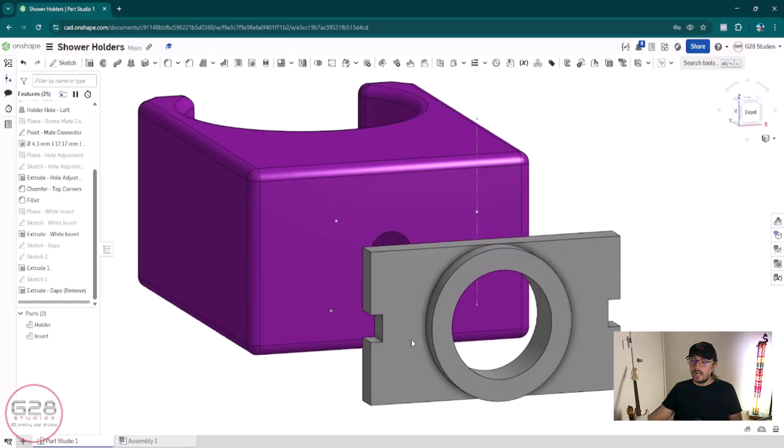So now what I need to do is remove this part from here. That's the interesting part.

So what I can do is something called... where is it? There is an option. Okay, so first I need to create a sketch here and then use this option, project convert. What am I going to project? I'm going to project this whole face. And as you see, it just did that for me. But...

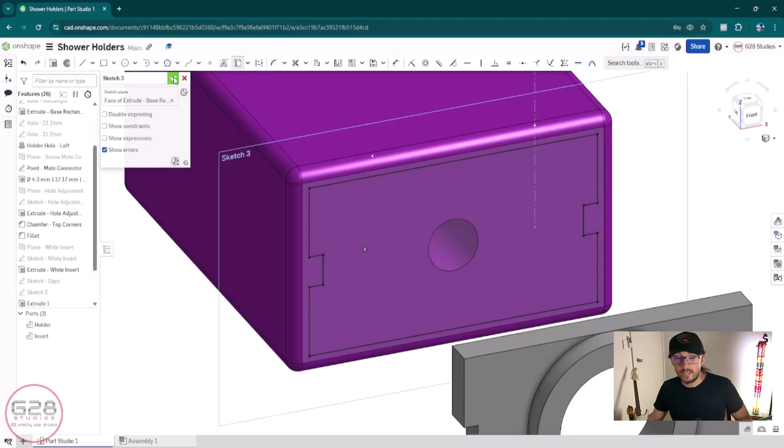Let's click OK and let's edit this sketch. So I need to give at least 0.5 millimeters of clearance, because if I do this that way, this white insert won't go through. I need to give it some space because 3D printing is not perfect, so there's gonna be some tolerances that you have to play with, which is 0.2, 0.3 millimeters difference.

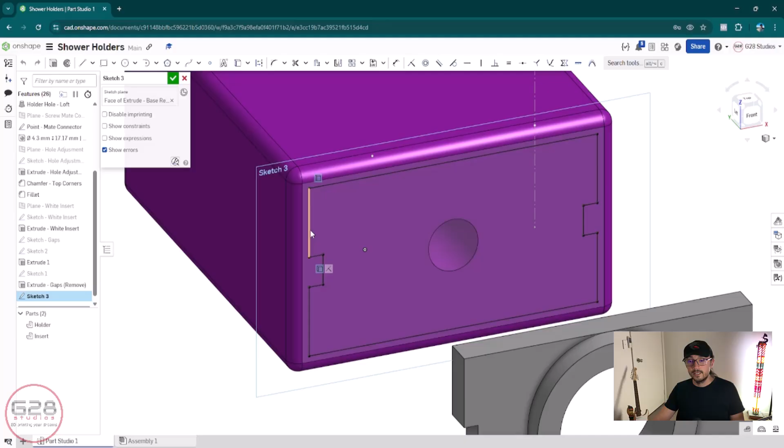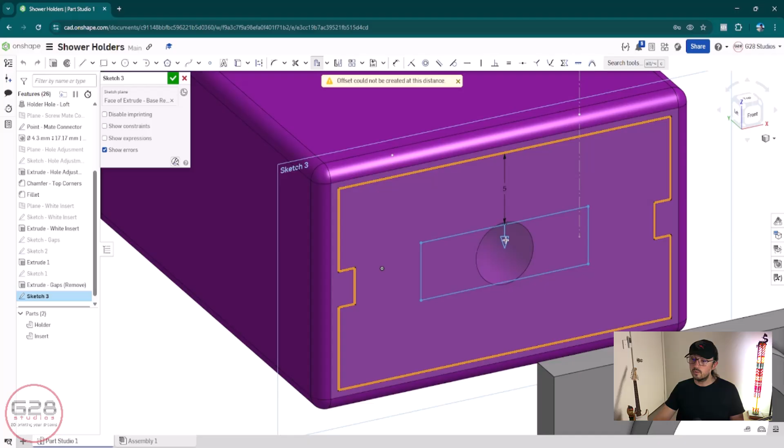And so what I can do is, right, there is an option which is offset. So I'm going to offset this, all the lines, and I'm going to click this arrow and it's going to go the other way around, and I'm going to tell it, okay, I want to go just 0.5, but probably so that's gonna be 1 millimeter.

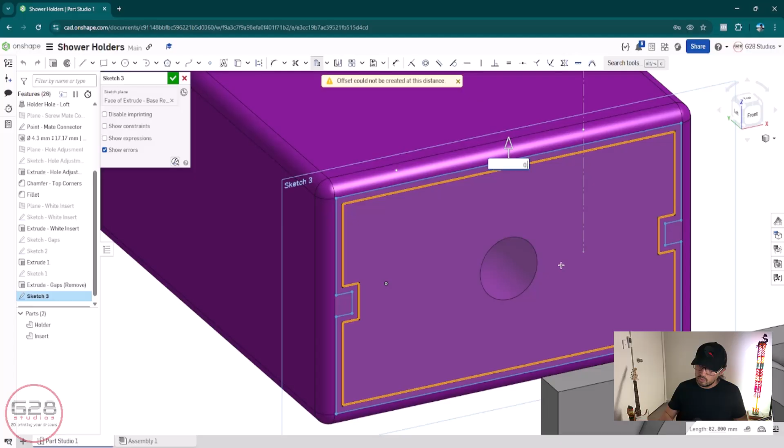And from what I can see here, well, this is perfect because it's made by using mold injection, but I would say that having 0.5 on one side, 0.5 on the other side, it's gonna be 1 millimeter. And if I say 0.5, you know what, I'm gonna leave it like that. I'm gonna go just one touch lower, 0.4. And if I hit OK...

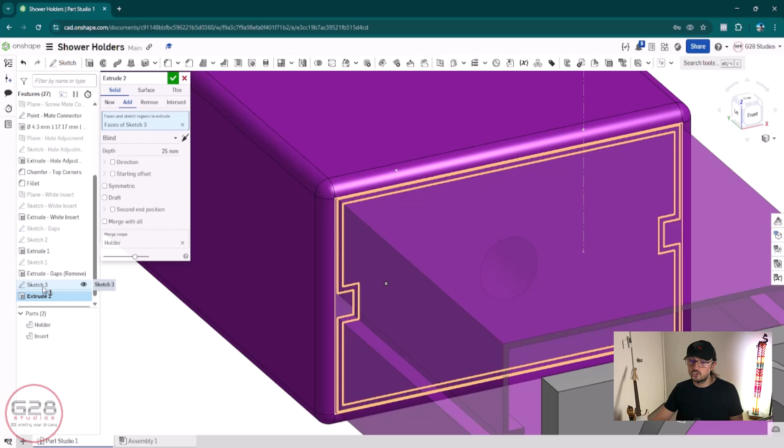Then what I can do is I want to extrude the sketch, and I want to remove that. Okay, so how much am I going to remove? I'm going to remove 2 millimeters. And if I hit OK...

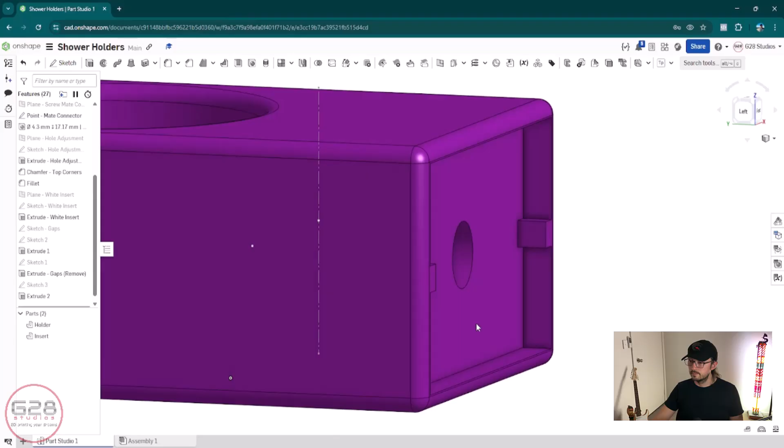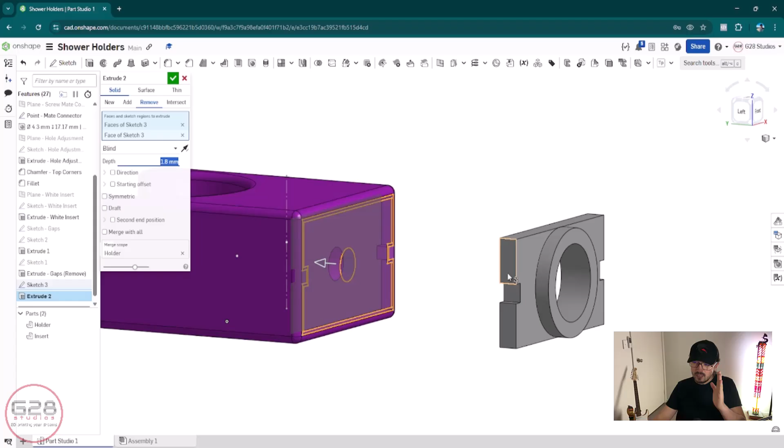I'm not gonna remove exactly 2 millimeters. I'm going to remove 1.9 millimeters or 1.8. 1.8. That 0.2 millimeters is going to push 0.2 millimeters this out. It's gonna stick a little bit. You are not going to notice it, but I rather having that because I'm pretty sure this is going to clash with the shower, with the base, like with the main structure of the shower.

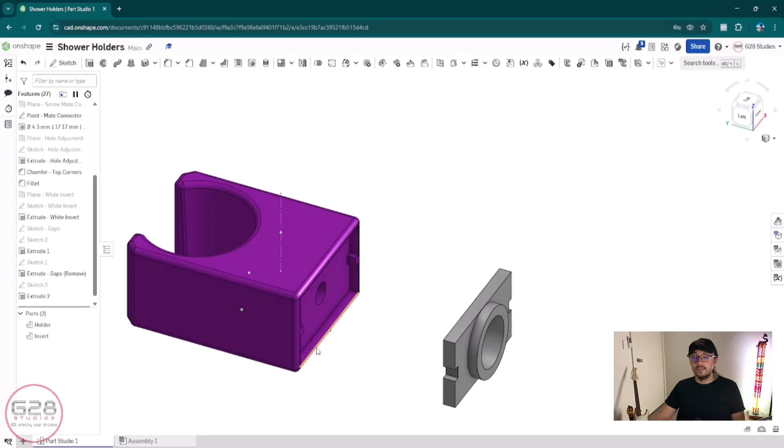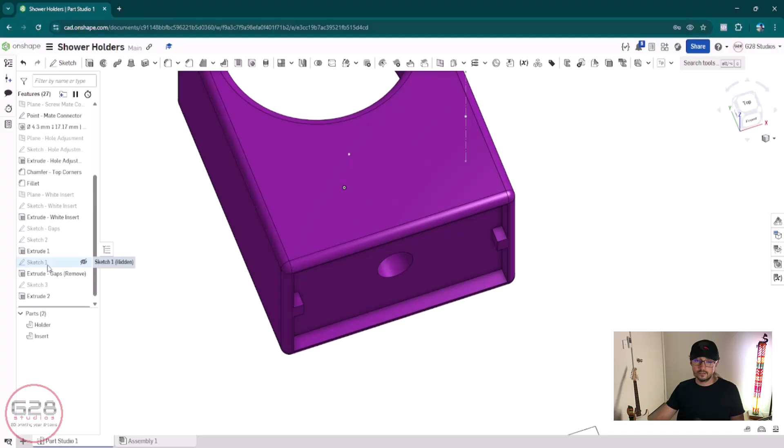I think I'm done, but there are a few things that I am considering at the moment. So the first one is, if I'm going to print this, let's export this, and you will see what I'm talking about.

I'm just going to rename these options. So, sketch, this sketch is okay. So sketch... I'm gonna rename everything and I'll be back in 1 second.

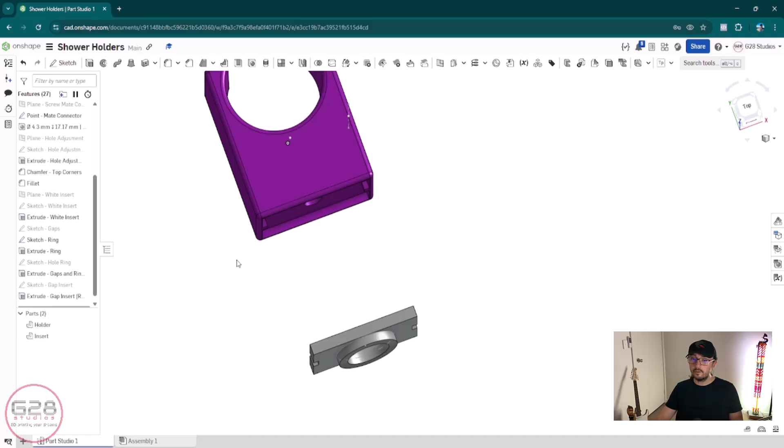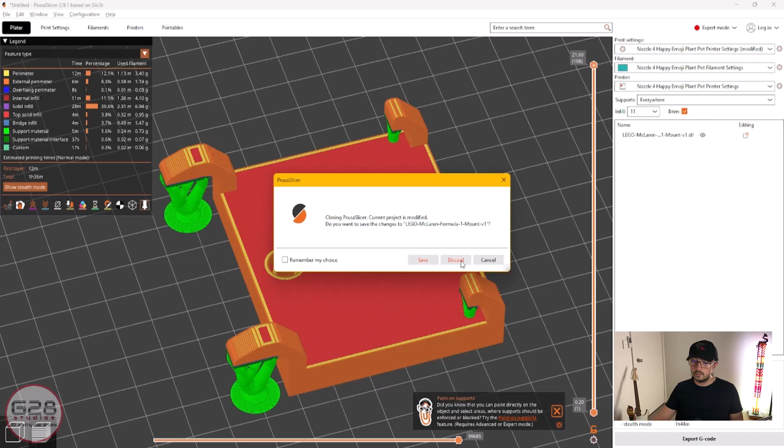Okay, so they are now all renamed. So what I'm going to do is I'm going to select both and export them, and I will say shower holder, export. I'm going to close this one. That's another project where I'm working at the moment. Sorry. So I'm not gonna update it yet.

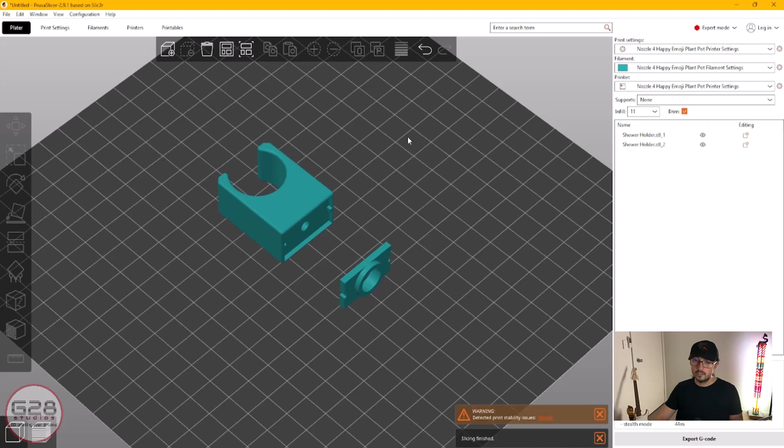So if you select, so this has been exported as only one object. So if you click it and click object, I mean separate by objects. So you have now 2 objects, and I want to use this option, which is place on face, and I'm going to place on face on this face, and I want to place this on this face, and then just arrange them to make them look neat.

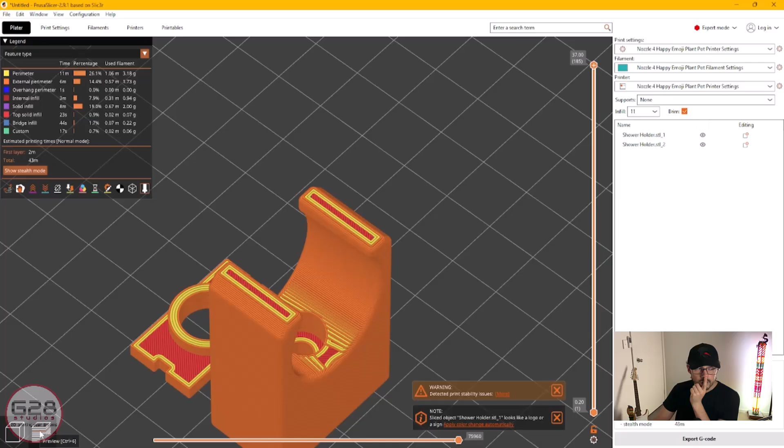Now, I've got an issue, a big issue here. If I go to the preview, and if I go this way... so this is going to print in the air. And if this is going to print in the air, I need to put some supports.

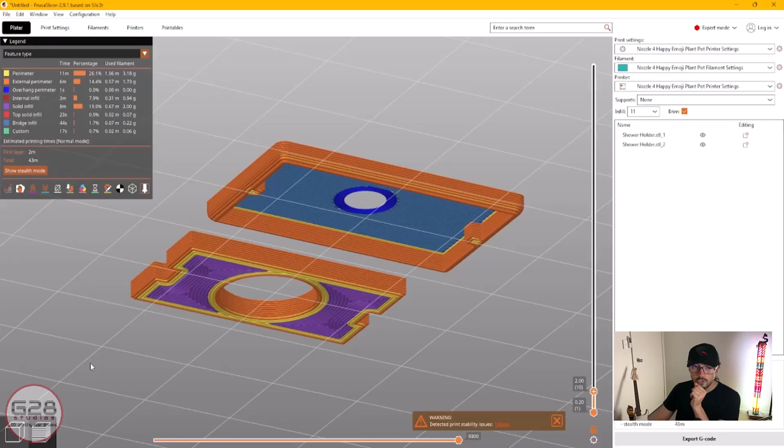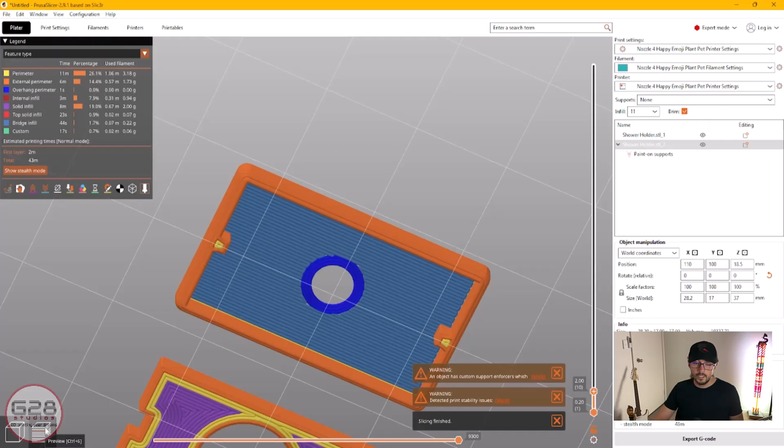So let's draw some supports here. To draw supports on Prusa, so what you do is click the object and then come over here, paint on supports, and then I'm going to paint some supports around this area, just like that. And then you come over here, print settings, support material, and click this and change grid to organic. And so what this is going to do is it's going to create that base support, and then it'll create the lines.

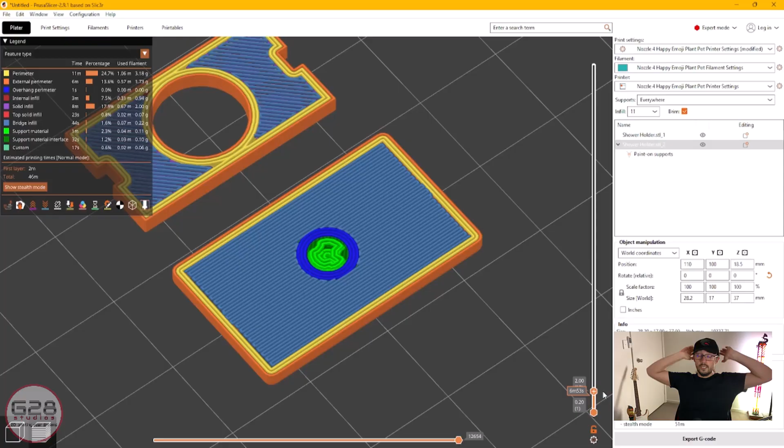Honestly, I need to try it because I trust my printers, but sometimes you can't trust those lines.

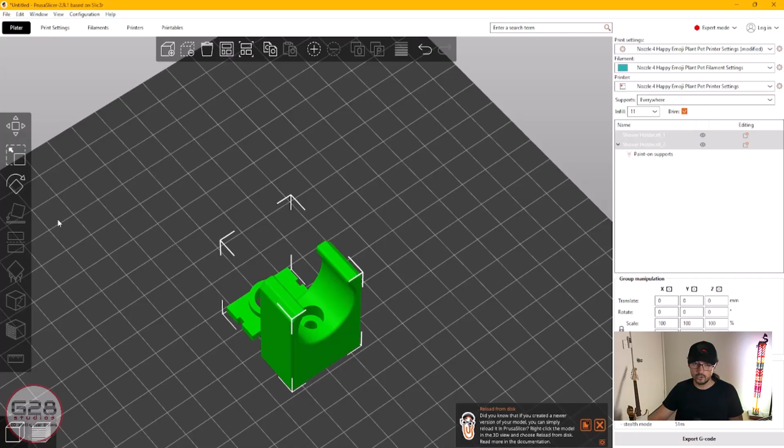However, I'm going to change one little thing, which is the position. So I'm going to shift this 45 degrees around, and I'm going to do it for both. So you select both, come over here, change, click rotate and change it. And then I want to see, this is gonna be the same. So the lines are going to be straight.

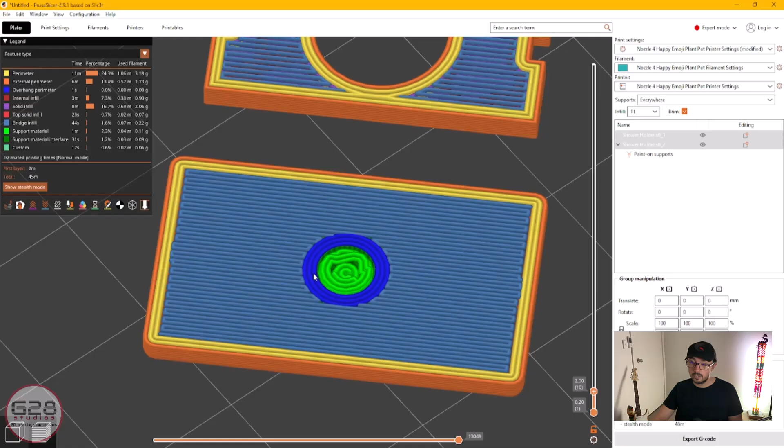And I wanted the printer to print the lines from corner to corner. It's a shorter distance, maybe. Yes, it's a completely shorter distance. Let's try once again, I'm going to do this and see what happens. No, it's going to be the same. It's going to be the same. So I need to try. I will take the risk. So I will print this way.

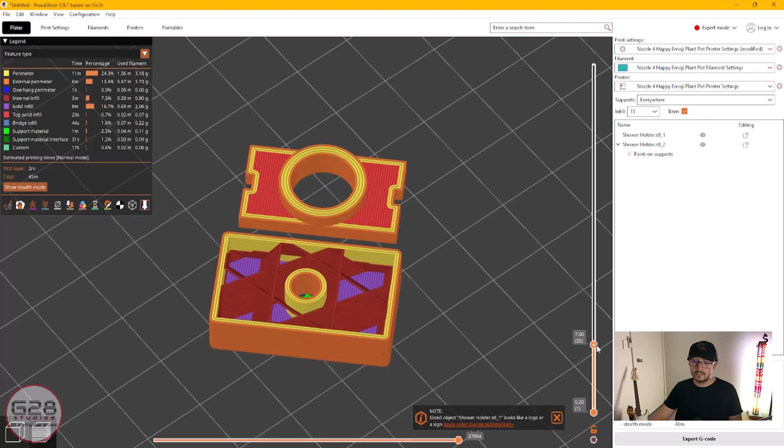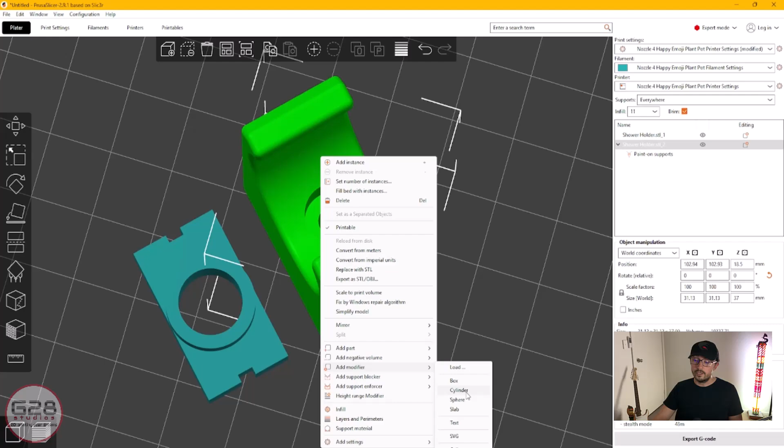But I need to reinforce this area because that's where the screw is going to go in. It's super easy to do here. So you select the object you want to reinforce, right click on it, and hit add modifier. In this case, I'm going to use a cylinder.

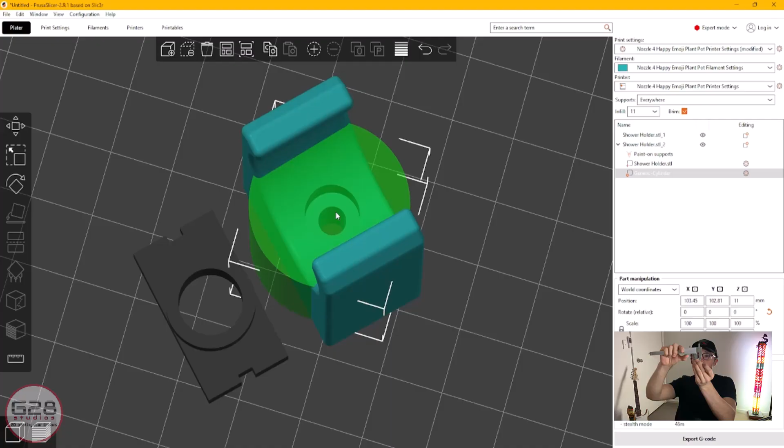My cylinder will be at least 9 millimeters. Why 9 millimeters? Because the head of the screw is 7.5 millimeters. But if I go 9 millimeters, this gives me 1.5 millimeters more in total, so 0.75 on each side of the head of the screw. This is going to give support so I can tighten the screw a little more so it's not loose.

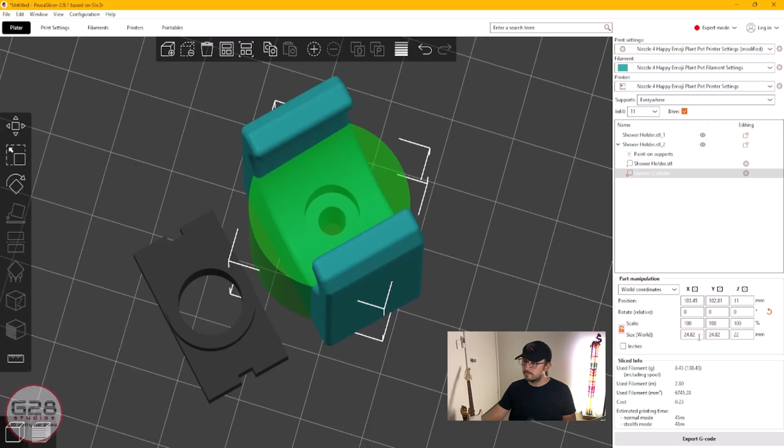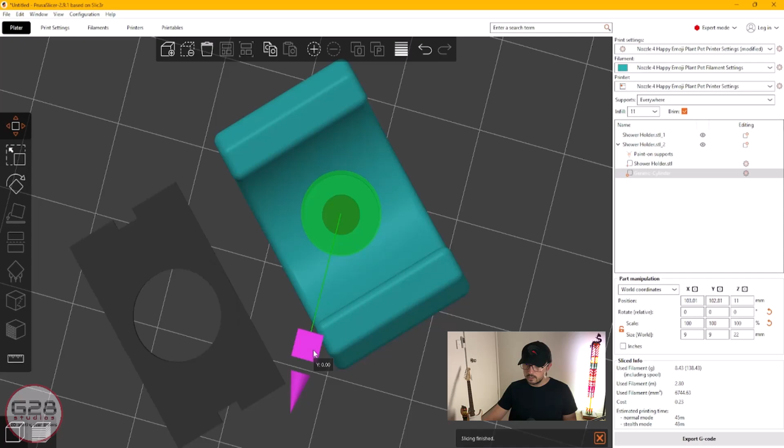And so if it's 9 millimeters, to edit the properties of this circle, you come over this area and say size. You have to unlock this, and then on X it's going to be 9, on Y it's going to be 9, and Z doesn't matter. Why? Because the stronger, the better. If I move it that way and probably down a little bit, that's right in the center, reinforcing this area.

Now I want to do something with that generic cylinder. So I'm going to tell that cylinder to become an infill area. You click here and change it, you go to infill. This converts the cylinder into an infill area, and I need to tell it to go high, 50%.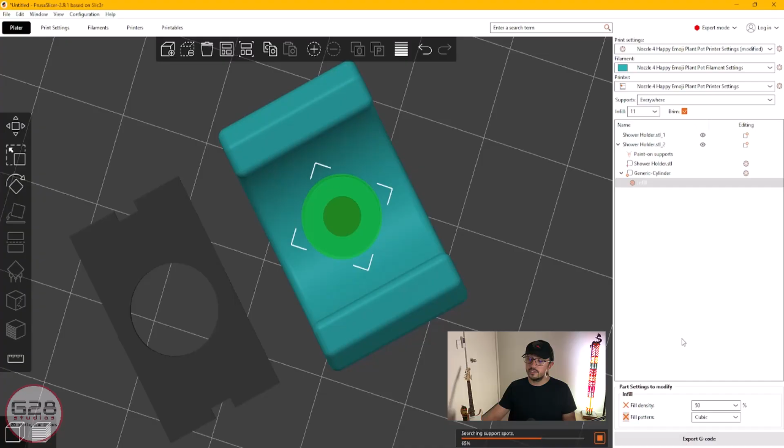And so if I come over here, you see those purple lines, that's 50% of infill. I'm going to bring this back to 5%. And now you'll see that nothing changed. Why? I don't know. I'm just going to go with 1% and it doesn't change anything.

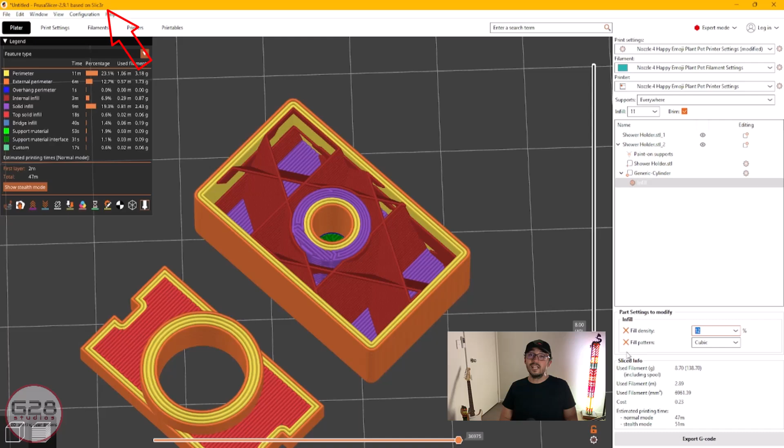That's strange. I will not trust these numbers because after the 2.8.1 update on Prusa, there have been a lot of glitches. So I'm not going to trust this thing saying, oh don't worry, 12% is like 100%. I'm going to go with 50%, straight to the point where I want to be.

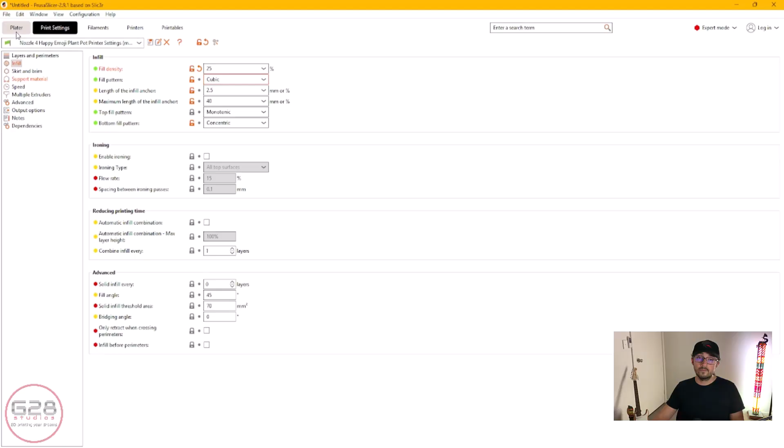And I'm going to change my whole infill to 25. So the whole infill is this. I want this to be really strong, and that's it. So I need to print this.

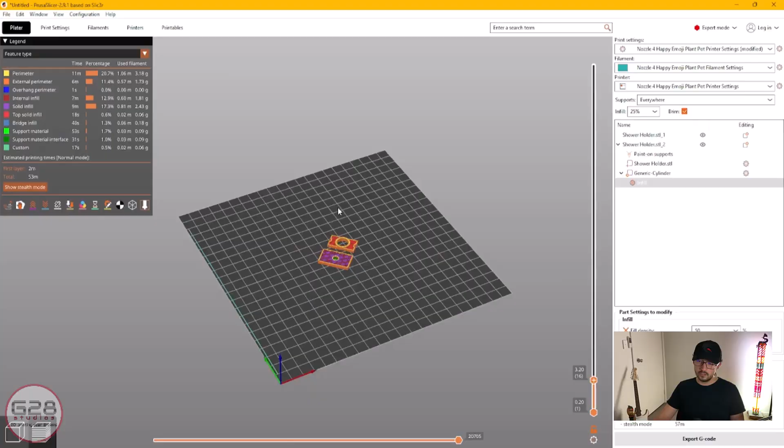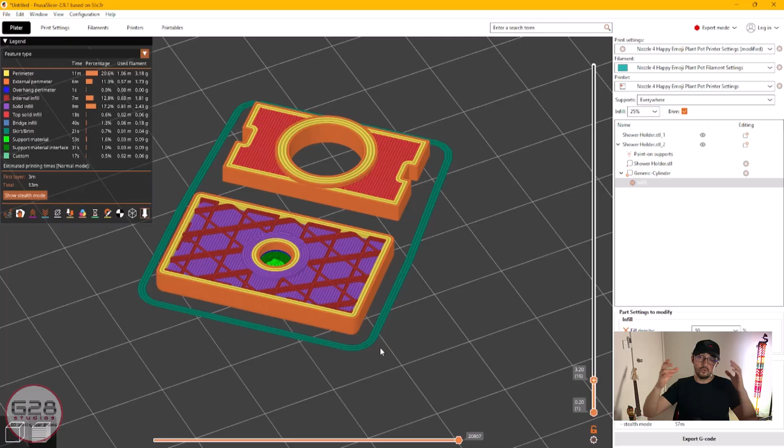Before I go to print this, I need to add this thing, 3 loops of skirt. This is going to prime the hot end so there is no oozing causing troubles while printing.

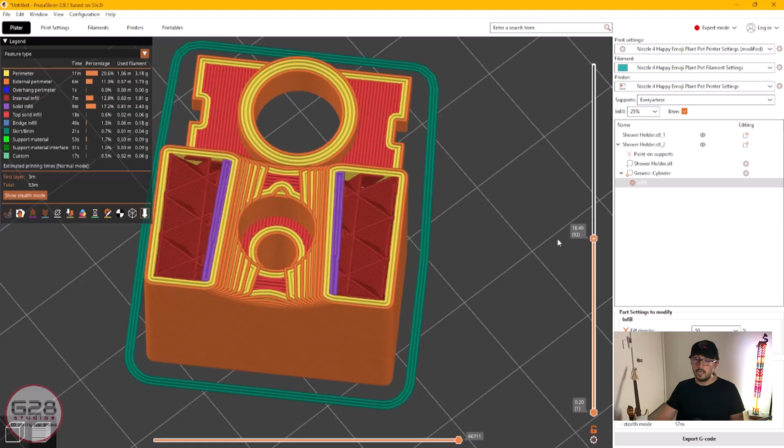So we have supports, then it comes up, infill, both infills, goes up, okay, and it finishes. I'm looking at the bottom one, at this one, so now I'm going to look at this one. There's nothing to say about that one, and that. Perfect. So I'm going to save this on the SD card.

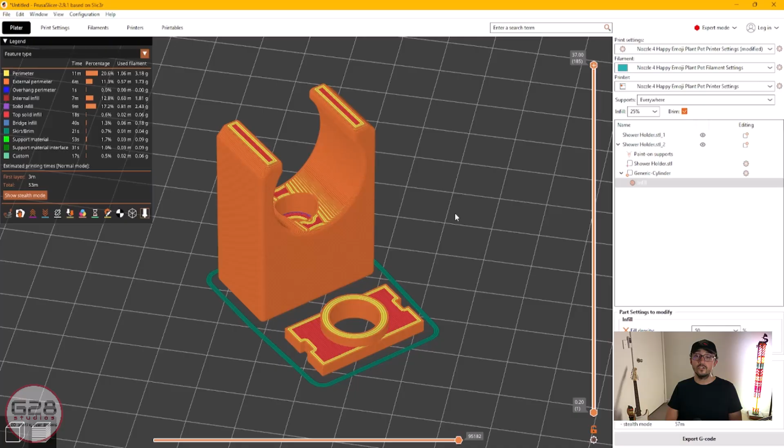I pulled this off the bed and I wasn't surprised because I knew the printing on the bottom part was not going to be great as I was expecting. The big problem with this area was that the lines that go from side to side are like bridges, hanging lines that print in the air. So the problem is it's not flat at all, and this is a little bumpy.

So if I try to put this inside, it sticks a lot. I really don't like that. That's the first thing. The second thing is, I don't know, this is going to be ugly even though it's going to be covered. I don't like to hide the ugly parts. I really like to have 100%, or at least 90%, of parts printed properly and clean.

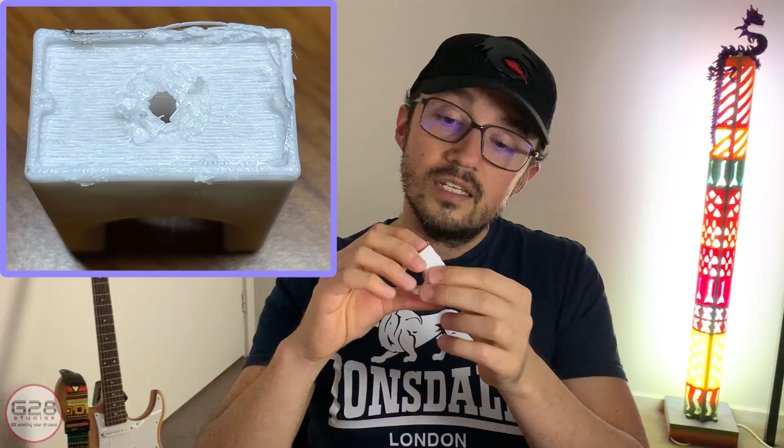So I changed the position of this one and reprinted it like that, having the supports on the bottom, and it's a mess. It's a complete mess. It was really hard to remove the supports because it's only 2 mil of support, so it's really tight. While removing the supports, I messed up the border, so it looks ugly. But I printed another part, this one, but I printed this one like that.

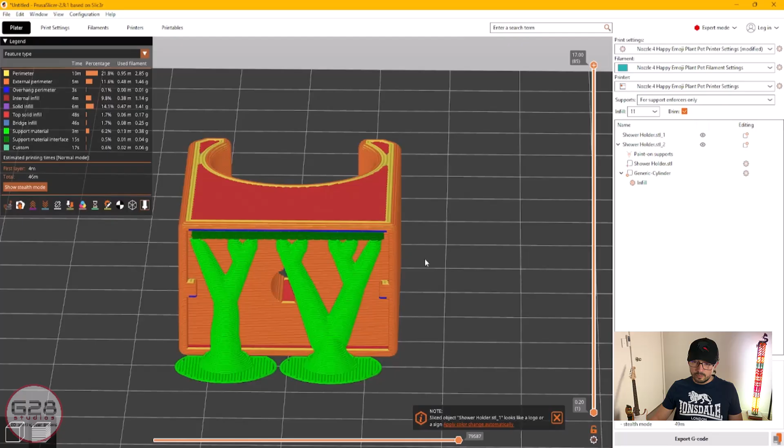This one came out great. It's really clean, there are no issues with the bits of the overhang. So let me show you what I did. What I did here was I told the printer to help me with some supports here so that these lines, the blue lines, have some support when they're printed, and they came out great.

It's super clean. So I printed that part, and I printed the white part. It sticks out, but it's the same distance that we made in the design, but it's clean at least, you know. There's no hidden ugly printing parts.

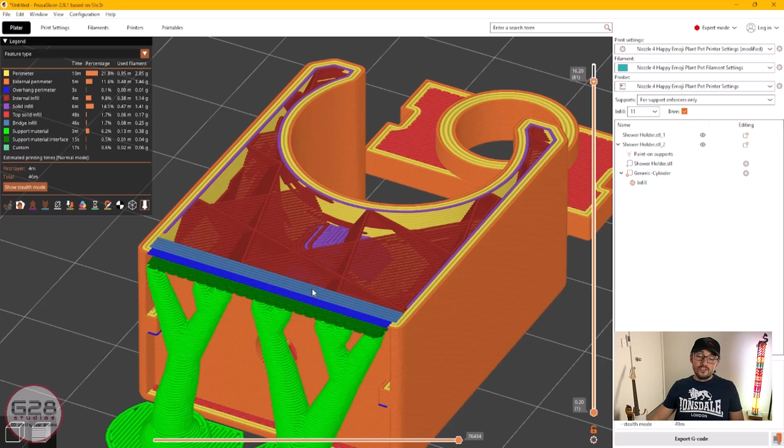But I thought, okay, I could probably do something else, and what I'm going to do is print both parts in one. So I'm going to join together the two parts I created. Back on Onshape, what I'm going to do is take this part and make it come and join here. So the first thing I need to do is remove what I did here.

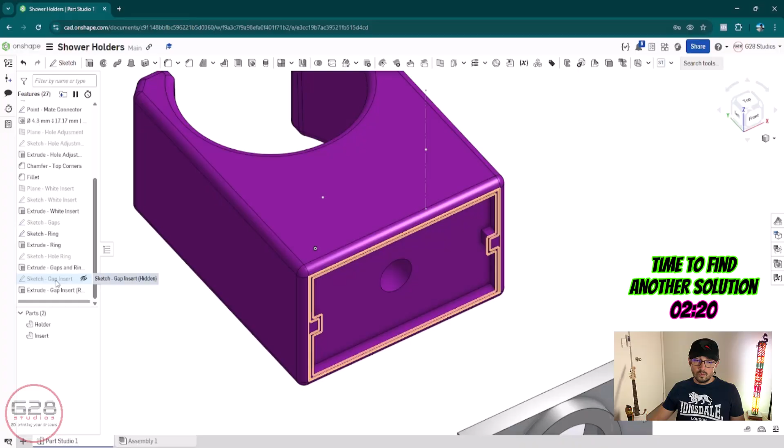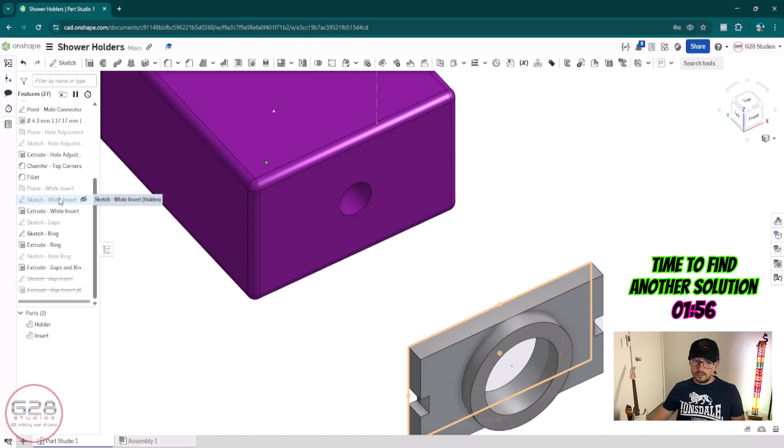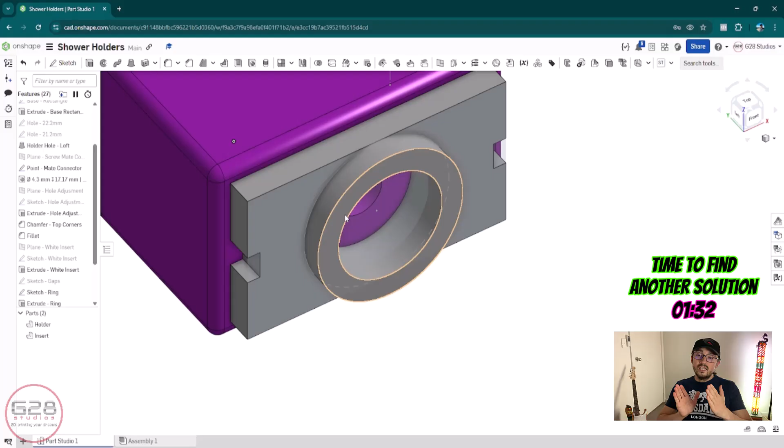So instead of deleting stuff, what I'm going to do is suppress that one and suppress this one so that this part is flat as it was originally. But this one, I'm going to take this sketch, and then remove this option. So I'll tell the sketch, you're not going to start on that plane, your starting point is going to be this one. Hit OK, so that for now both are stuck together, but I need to push these 2.5 millimeters back inside.

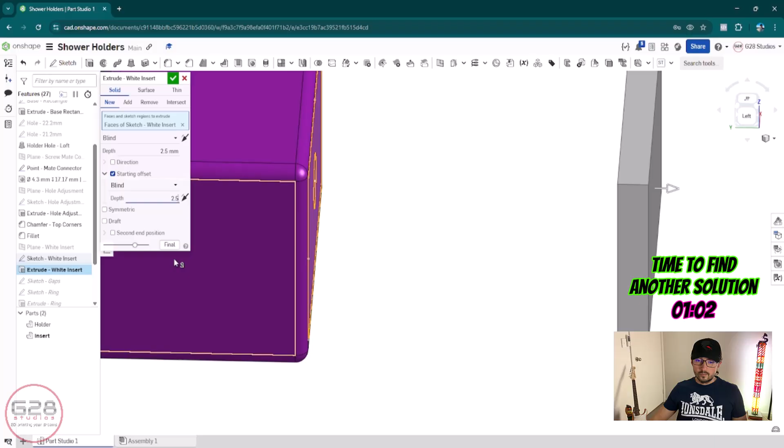To do that, on the extrude part, I'll say starting offset, and my starting offset is going to be 2.5 millimeters, but on the other direction, on the other position. Before I click OK, I hit add, because I need to add that part to this part. So click OK, and then it shows me all these errors.

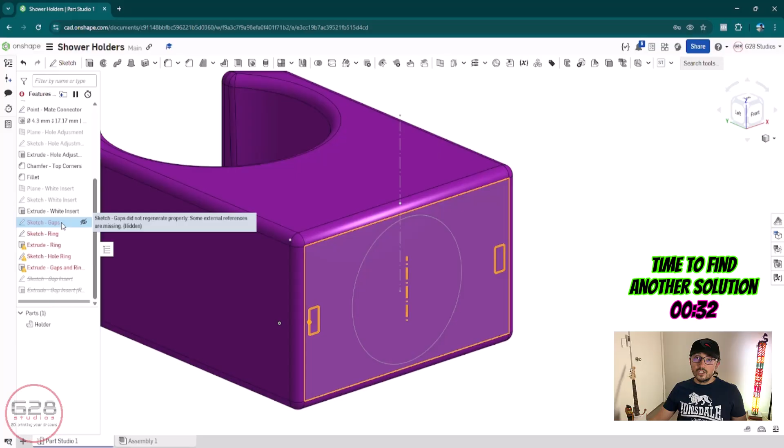No problem. So now what I have to do is deal with gaps. I don't need gaps anymore, so I can suppress them, and the sketch ring, that's going to be okay, but I need to reassign everything. So what I'm going to do is remove that, and tell it the face basically.

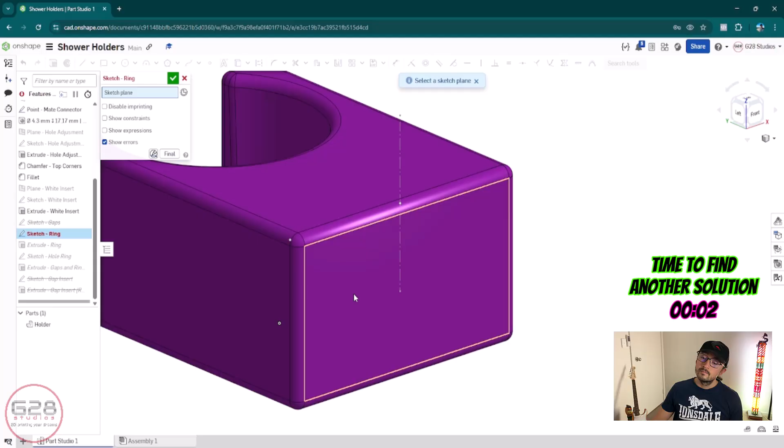No, you know what, I did it wrong. Because basically what I can do is suppress the plane, I don't need this at all. So I'm not going to use that, I'm not going to use this one, but the sketch ring, yes, I need it.

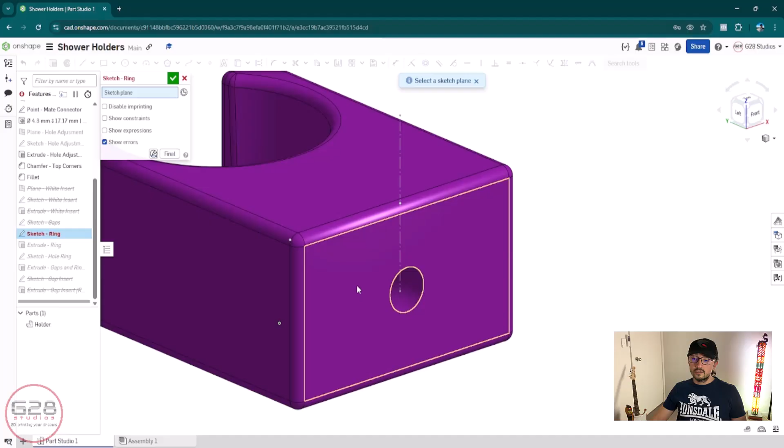So you will start from here. And if you click OK, let's see what's happening. Ring did not regenerate properly, some external references are missing. Okay, remove, click it again.

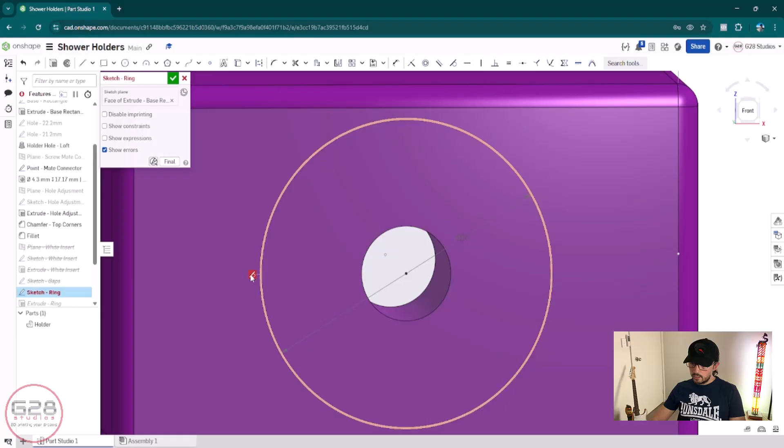Okay, the reference is this, the tangent option. So you remove this, you click it and remove it. Okay, one sec, come on. Remove that, and I'm going to move these away. Oh, sorry, I'm just going to move these.

No, cancel that. That's 14, so I'm going to remove this distance, this 14. So it's telling you... what is it saying? One sec. So I'm going to remove this base.

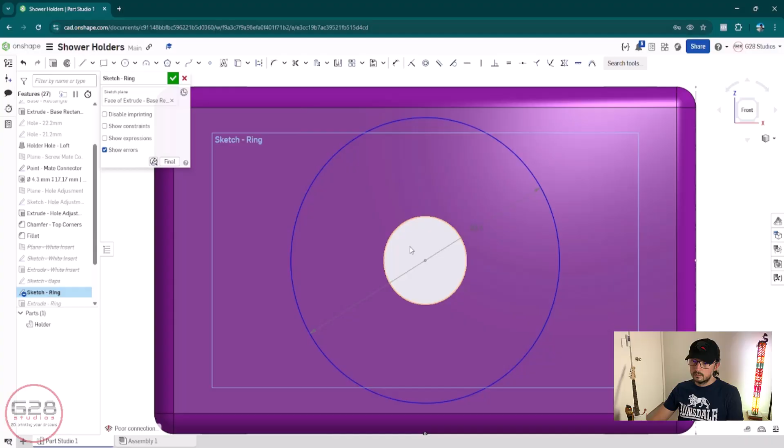I need to remove this. I can remove the distance, the size, the dimension. Okay, that's strange, because I can't edit it at all, and I can't remove the circle.

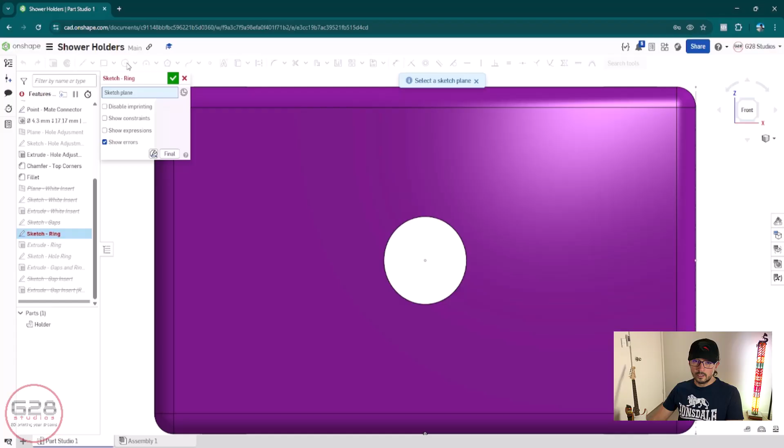So I'm going to do one thing, I'm just going to do that. Sketch gaps, I don't need that. And if I come to the sketch ring, and if I hit this, no. So what I'm going to do is create a new sketch.

I'm going to create a new sketch here. We already know that we need the center, and it has to be 14 millimeters diameter. Click OK, and then what I can do is remove this, I'm going to delete that. I don't need it, and it's not working. Not sure why, but that should be basic.

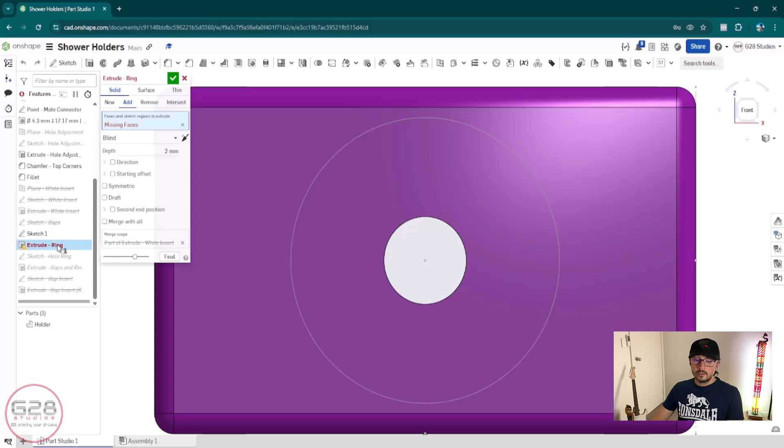So on extrude ring, I'm just going to double click that, remove this one, and reselect this one. Oh, not that one, this one. So that's going to do this. Now, add, yes, and where is this going to be added? To this. Now, click OK.

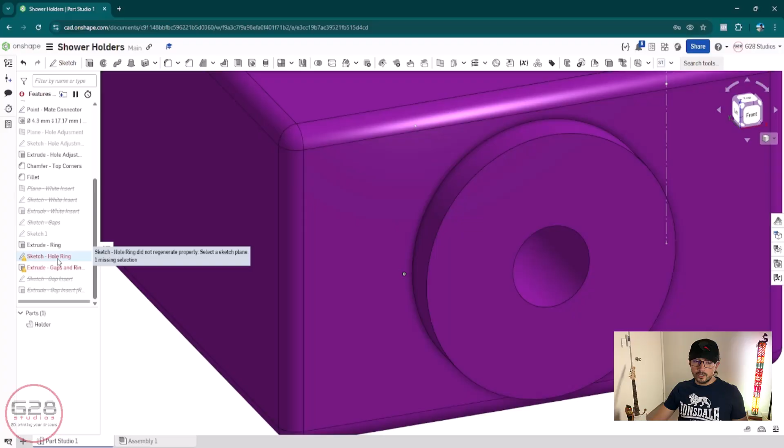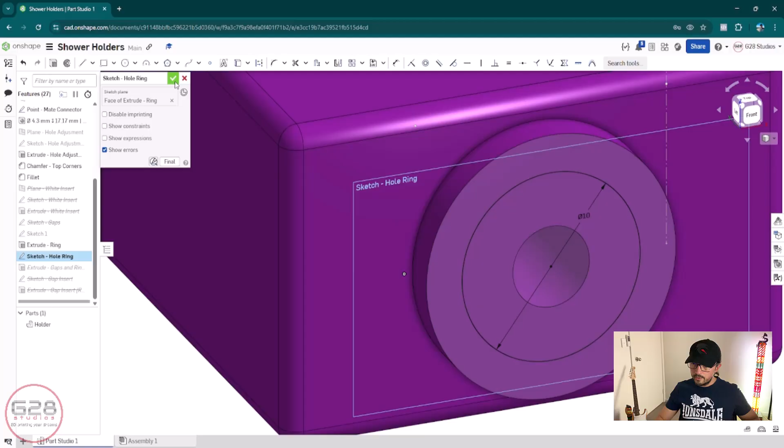And then come over here to the sketch hole ring. I'm going to remove that, and select this face, that's 10 millimeters. I'm just going to remeasure this one. So if it's 14, it has to be 2 millimeters on each side, so 10 millimeters diameter.

And then extrude gaps and ring, I'm going to remove this one, and remove this one, and I'm going to keep that up to face. I'm going to remove this merge scope because it was wrong. So I will reselect the merge scope, this one, and up to face is this one, and click OK.

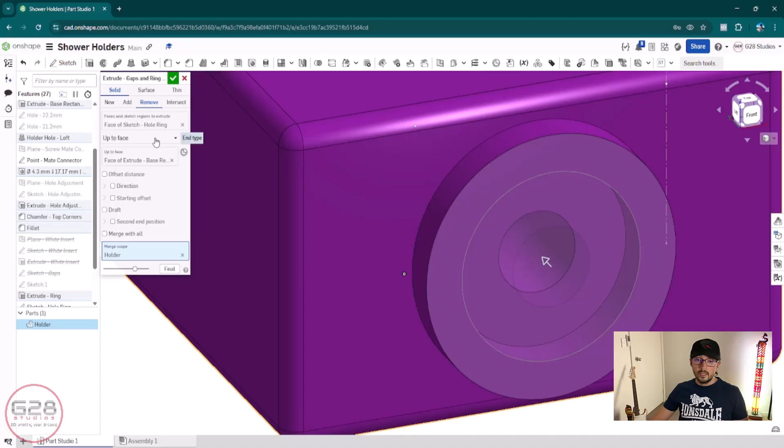So basically that's it, up to face, yes. Now what's the distance? If I need to know what's the distance between this face and this face, you click both faces, and on the bottom right corner you will see the parallel distance, and that's 2 millimeters. Just to double check - yep, 2 millimeters.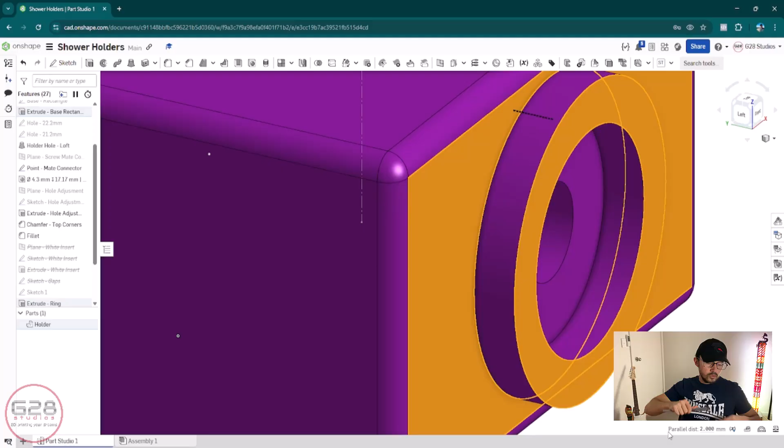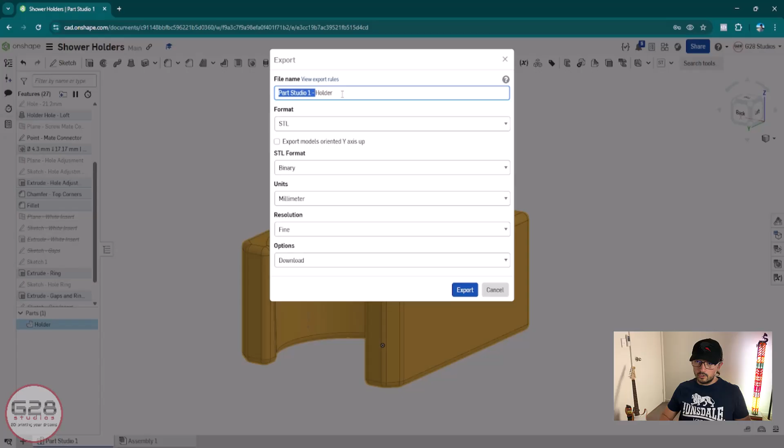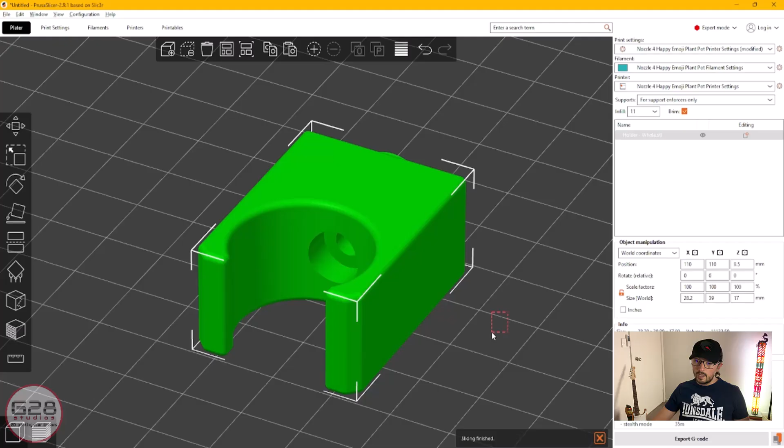Now here comes the good and funny part. What I need to do is export this part as an STL. I'm going to call it holder whole, and I'm going to open this one. I'm going to remove everything and open this one here, and then I'll do the next thing.

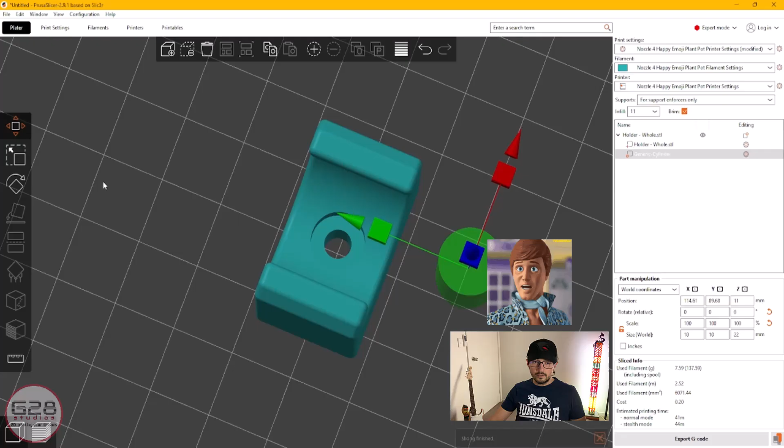As I did before, I added a modifier, and it is a cylinder. The cylinder is 9 by 9, but I'm going to make this one 10 by 10 just because I can. So I will move this, trying to make it dead center. I'll try - I think that's gonna be enough, I'm not gonna overkill myself with that one.

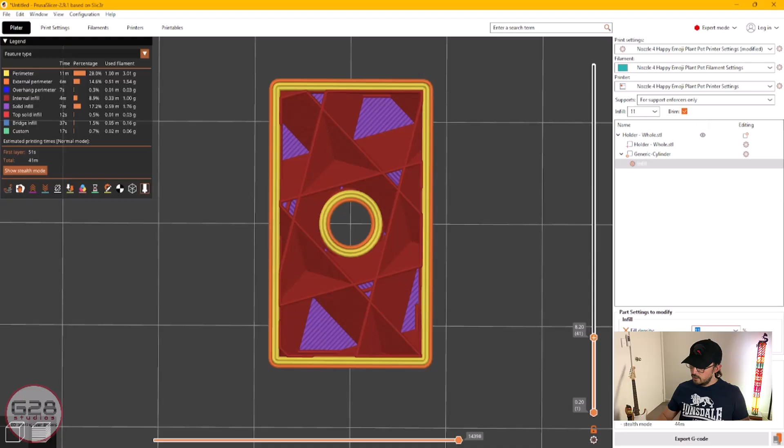Remember to change that part feature, so this is going to be infill 50%. You go up and down, and it's showing me that yes, it's 100% infill, which is okay, no problem at all. It goes up, and...

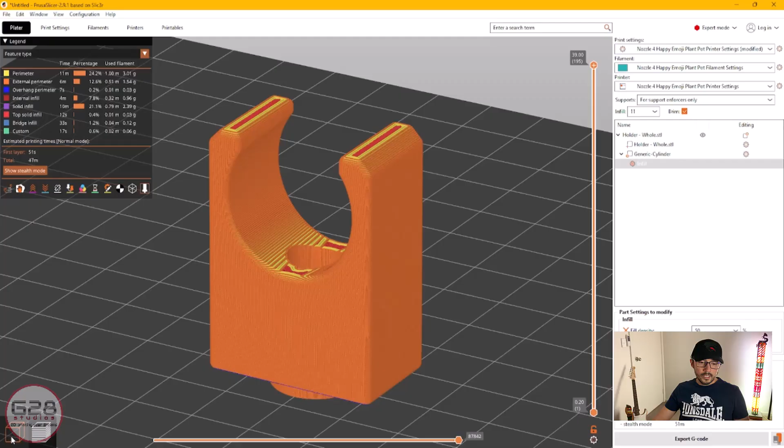Cool. Now what I need to do is move to lay that on one of the faces, of course on this part, because it's the flattest area on the object, and it's going to be really easy to print the hooks.

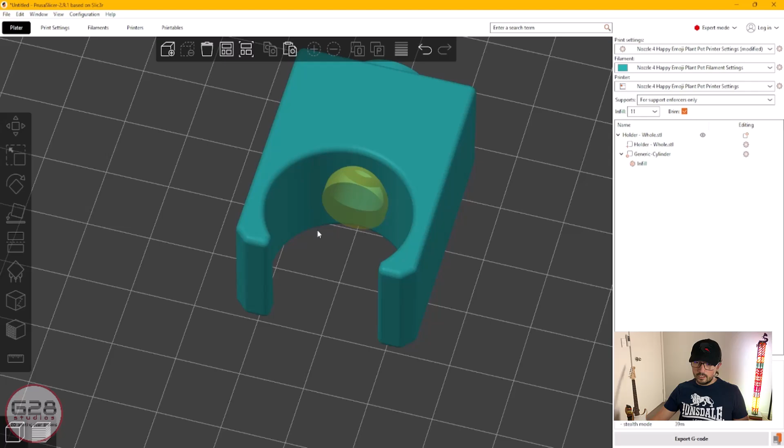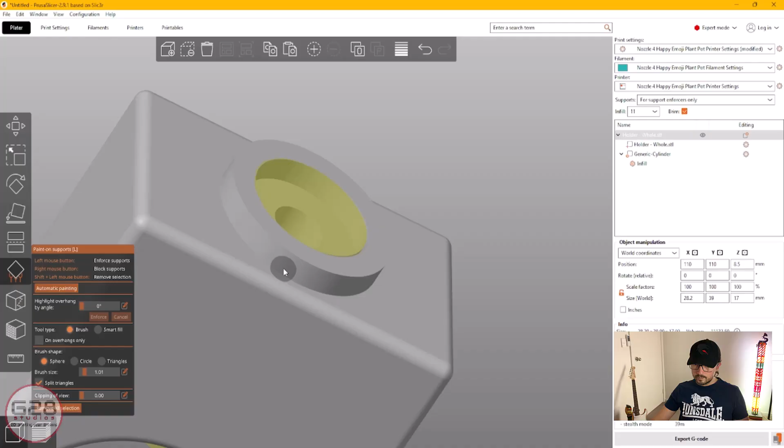Now I need to add some supports here, because if I don't add supports here, that's gonna print terribly. So I'm going to paint some supports - you select this option, paint on supports, and I'm going to make the brush a little bit smaller, and brush here, trying not to paint over this area. To remove, I'm holding the shift key and going slowly because it's going to remove part of the support here too. Let me see if this works.

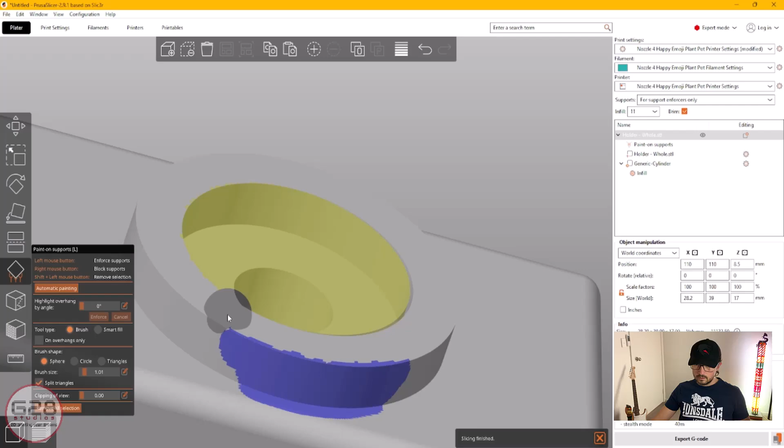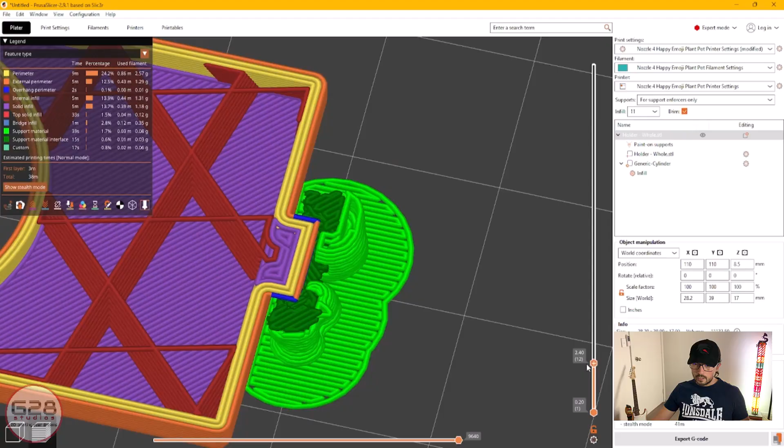No. I will keep this like that. Maybe a little bit more on this side just to help that angle to be printed cleanly. And you come over here and check what the supports are going to look like. That is perfect.

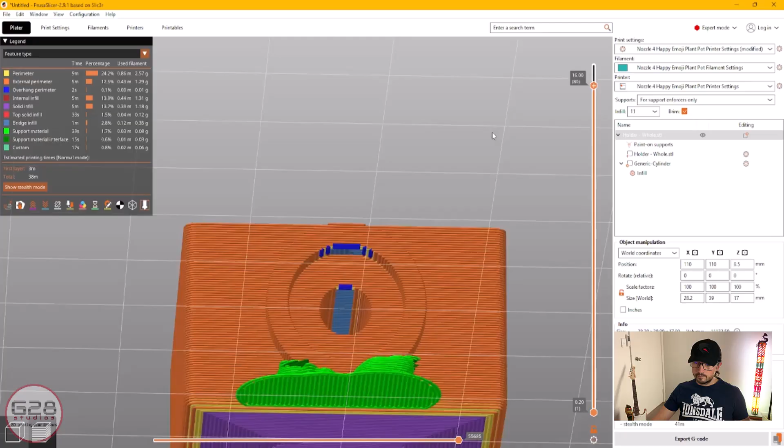So it goes up, prints the hole, prints the ring, it's gonna print this bead. I'm not gonna put any supports here - this is going to be... well, let's give it a go. Let's give some support there. Okay, and it goes up, it finishes, and that's it.

So I'm going to print this, and I'm not gonna show you any time lapse again. I'll send this to the printer and I'll be back in 40 minutes.

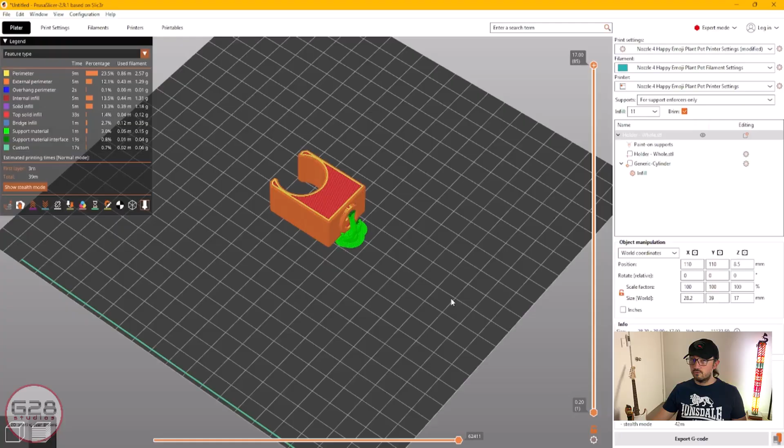2,000 years later - I've got them printed. They came really, really great. And I've got to be honest with you.

I printed these two and I went to the customer's place to install these holders on the shower, and they didn't fit because this hole on the inside attaches to the shower with a plastic plug, but the plastic plug was like 0.5, 0.2, 0.3 millimeters thicker. What I did was I had to come back, make a small change in the design and make this hole, the internal hole, 0.4 millimeters bigger. That was enough.

And the customer was really happy and he was surprised because when he saw the color of this silver silk filament, he said that's really similar to the color, to the chrome of the shower. I got these two printed - this one is just to install it there and this one is as a spare one, so he will paint this one with a chrome paint.

Well, I really appreciate you if you've been here during the whole journey, all these 3 videos showing you how to design this small piece. I hope you learned something.